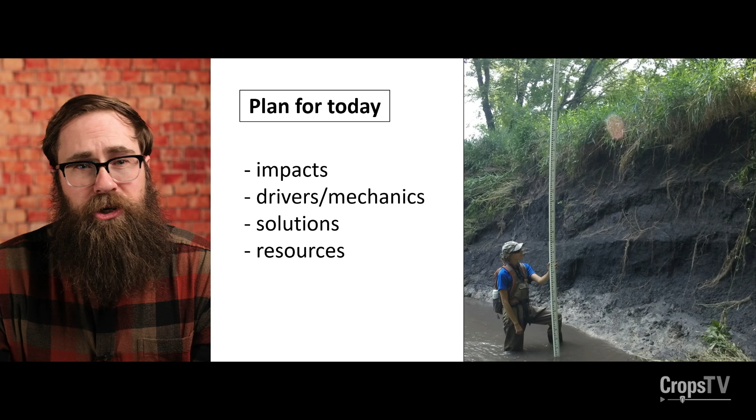I'm Billy Beck, Extension Forestry Specialist, and we're going to talk about streambank erosion. It impacts all Iowans, so let's dive in. So the plan for today, I want to go over the impacts of streambank erosion, impacts to landowners and all Iowans, and I really want to dive into the drivers and mechanics of streambank erosion. So why is this happening? Then we'll hit solutions, both from a site and watershed perspective. And then we'll go into some resources if you want to learn more.

So streambank erosion impacts. If you've got a stream running through your property in Iowa, you're probably dealing with some degree of streambank erosion. For landowners, it comes down to lost ground, threatened infrastructure, and it's just obviously very unsightly looking. For all Iowans, streambank erosion has potential to deliver sediment and phosphorus to our waterways. Sediment in excess can degrade aquatic habitat, and phosphorus in excess can be associated with harmful algal blooms. And also, we've all seen streambanks threatening infrastructure, roads, bridges, and other things. So it impacts everyone, not just Iowa landowners.

If you look into the science, streambanks contribute 31% of Iowa's riverine total phosphorus export. That's from a study by Keith Schilling and others out in 2021. And if you look around the U.S., Midwest, and the South, a range of studies have shown that streambanks contribute 25 up to 96% of the sediment exiting watersheds in those areas. So 25 to 96% of sediment loads in these areas are coming from streambank erosion.

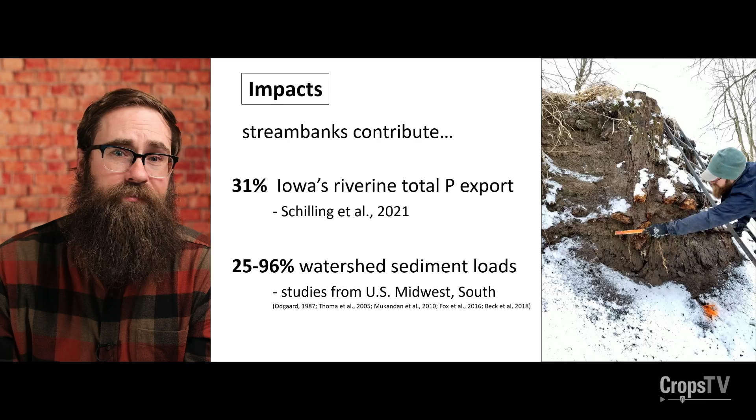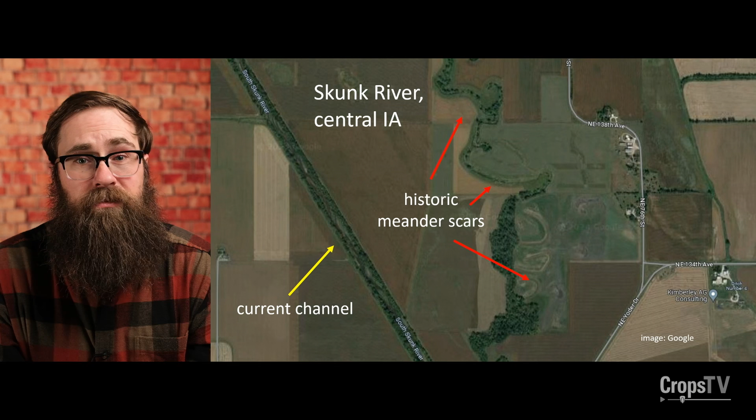Even in the middle of Iowa, going away from the Mississippi, this is the Skunk River in central Iowa. You can see the current river there with the yellow arrow, and you can see historic meander scars on the right with the red arrows. So again, even the Skunk River historically moved around quite a bit, and that's natural. In properly functioning systems with streambank erosion, sediment leaving the eroding bank would be mostly deposited on the point bar immediately downstream. So again, that's in properly functioning systems.

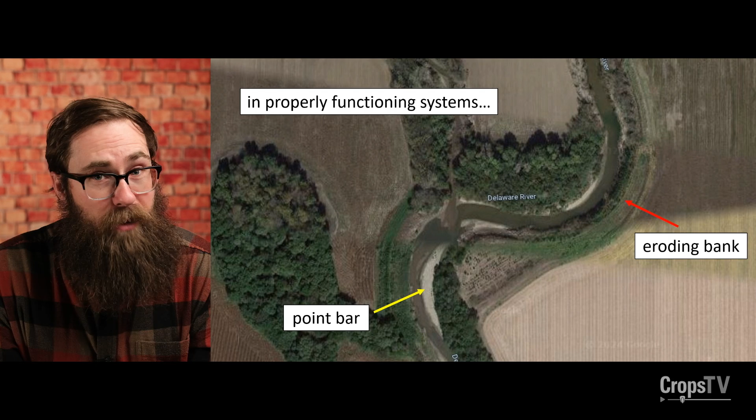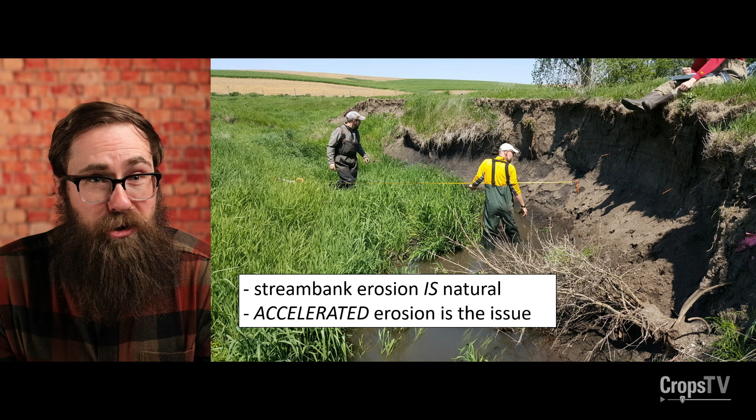However, most of our systems in the Midwest and honestly globally are not properly functioning, and we'll get into that in a second. So if streambank erosion is natural, what's the big deal? Well, the big deal is accelerated streambank erosion is the real issue, and that's caused by a range of factors that we'll hit in just a second. So it's natural, but it can be accelerated, and that's where the issues occur.

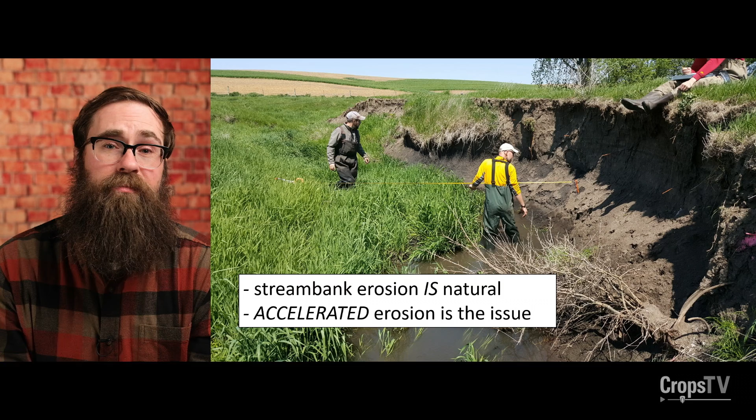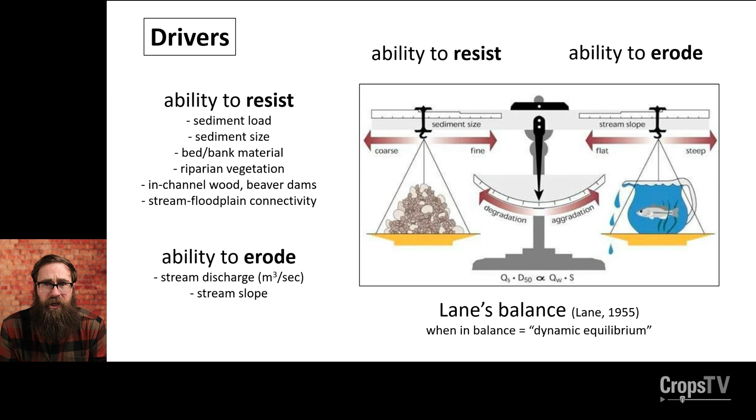And also the stream slope. You can imagine a very, very high slope versus a low slope and the power of erosion that is associated with each. So, Lane's balance: print this out and stick it on your refrigerator. It's a good thing to really get familiar with.

Okay, so what have we done on the landscape of Iowa, and honestly across the globe in many situations, to offset that balance? So here are some impacts of landscape and hydrological alterations on that balance, and really it's why we're seeing this accelerated erosion in our watersheds. So let's think about the ability to resist, those factors that we talked about on the previous slide. So what have we done in general on the landscape for the last 250 years?

Well, we've removed a lot of riparian vegetation, we've removed a lot of in-stream wood, and we've reduced sediment delivery, which is actually a good thing. Through no-till and edge-of-field practices, we've reduced sediment coming off the uplands and into the channel. However, if you don't balance that with adjusting the hydrology, the stream's going to want to pick up sediment elsewhere. It's very hungry. So where do you think it's going to pick it up? Correct, the channel.

So let's talk about the ability to erode. What have we done there? Well, we've converted land from prairie and woodland, which have incredible infiltration rates, like a sponge, the ability to soak up rainwater and deliver it slowly to the channel. So we've decreased that. We've converted to row crop, we've got urban areas, we've got parking lots. So we get a lot more flow hitting the surface of the earth and going directly into our waterways.

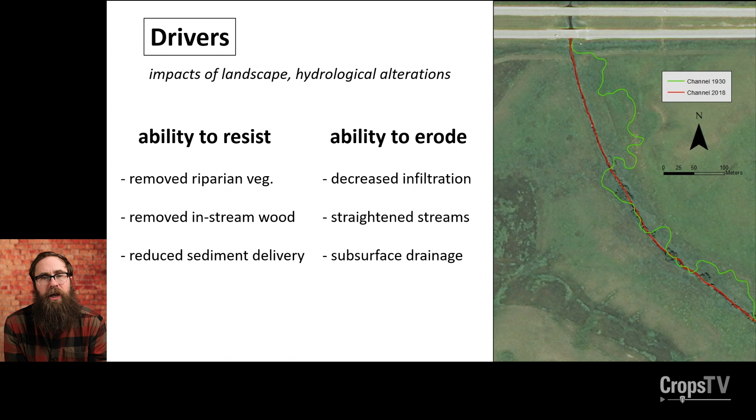So if you think about Lane's balance in that scale, we've really heightened the ability to erode, while at the same time lowered the ability to resist in our channels. So we're seeing an excess of stream bank erosion. So it's really important here to think about, a lot of times in these unstable systems, it's not a single point issue that is causing erosion, it's a watershed scale issue.

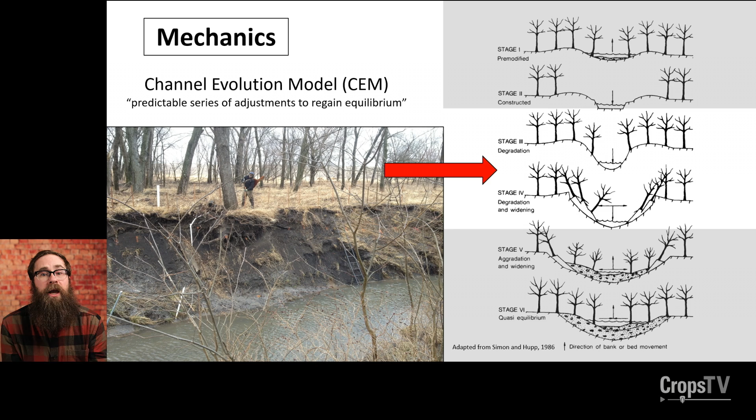So there's a really, really good example there in that picture of stage 3 and stage 4. That's just characteristic of those two stages where we're at in a lot of watersheds across the state of Iowa. Big, steep banks, big, wide channels. So degradation and widening. Eventually, the channel will form a new floodplain at a lower level and regain equilibrium.

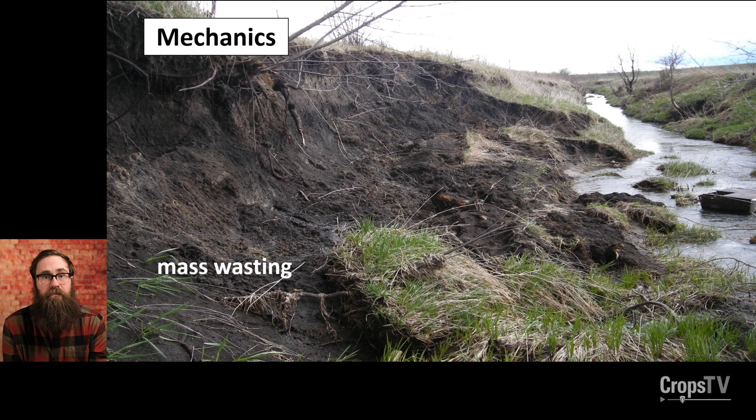Okay, so processes of erosion. Processes can help you determine where you're at in the CEM and what to look forward to in the future and how this channel is going to respond over time. Kind of gives you your bearings of where you're at. And it's also really cool to study scientifically. But we see a lot of mass wasting in stages 3 and 4. So this is giant failures of banks all at once or in giant blocks.

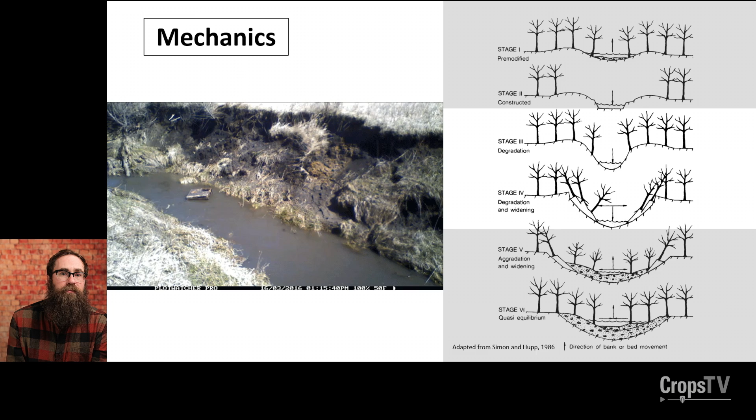That soil shrinks and swells and shrinks and swells, and those aggregates simply pop off and accumulate at the stream bank toe there, which have almost no cohesion, and they're easily whisked away by even the most moderate of flow events. So this really speaks to the importance of stream bank and riparian vegetation covering and insulating these banks, protecting them from those temperature extremes. I call this kind of pernicious erosion. It's sneaky. It's not a big massive event like mass wasting, but it really sneaks up behind you and is a significant contributor.

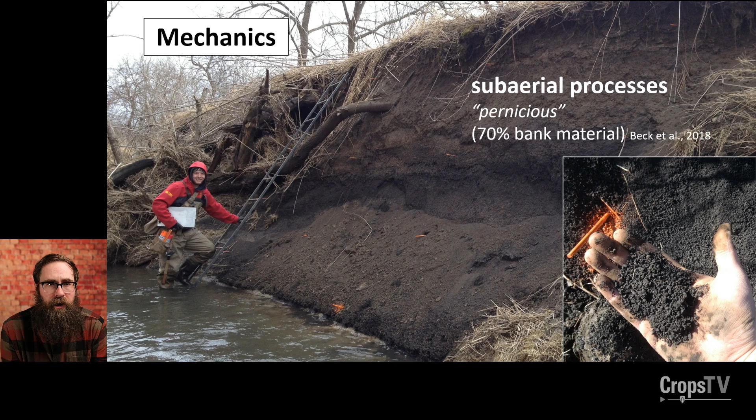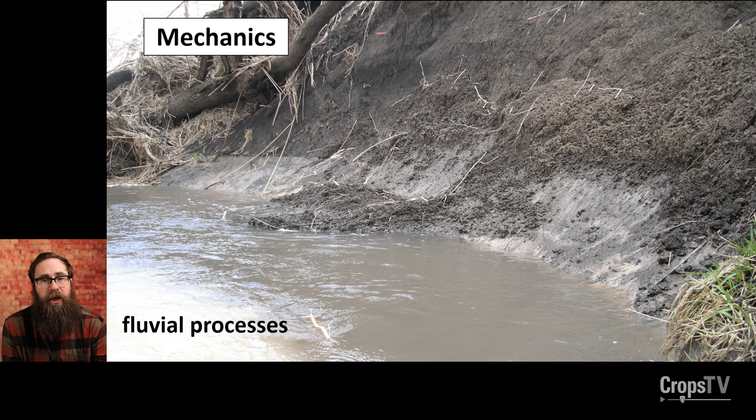And lastly, we've got the most straightforward one. That's basically fluvial erosion or fluvial processes, right? Being whisked away simply by the force of water grinding on the bank over time. If you think back to that layer cake, all those different layers have various ability to resist fluvial erosion in that system. You can kind of see a combo here. The subaerial process generated sediment is now being whisked away by the stream flow, and you can see the high water mark there.

The last thing they did is they reduced that slope from very, very vertical to about a 3-to-1 or 4-to-1 slope that spreads out, that dissipates the energy of an overbank event over a greater surface, reducing potential for scour. So, site-based solutions are not really a watershed scale approach, but if you've got cropland or infrastructure of some form being threatened, site-based solutions can work.

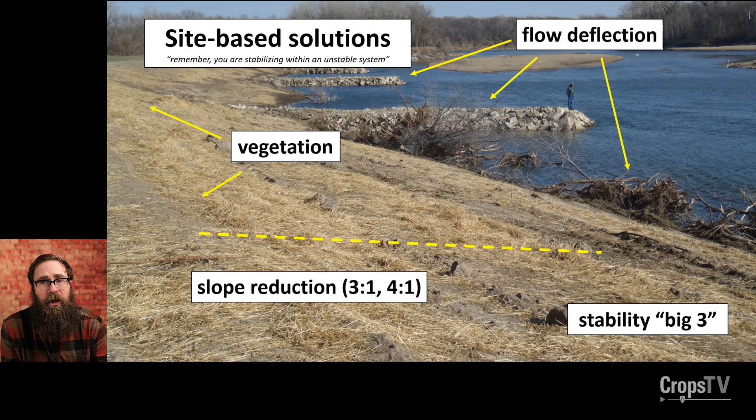All right, we're going to go from very non-complex to fairly complex here on things to do on your property about stream bank erosion. So at bare minimum, for these site-based solutions, start assessing and monitoring the erosion. See how fast it's moving and where it's occurring. Keep your eyes open for fine exposed roots on the stream banks. Those fine roots are very vulnerable in the environment and they disappear very quickly. So if you see fine roots, you know that's been very recent erosion. And take some photo points. Have somebody standing at the exact same spot year after year and see how much that bank is moving and when.

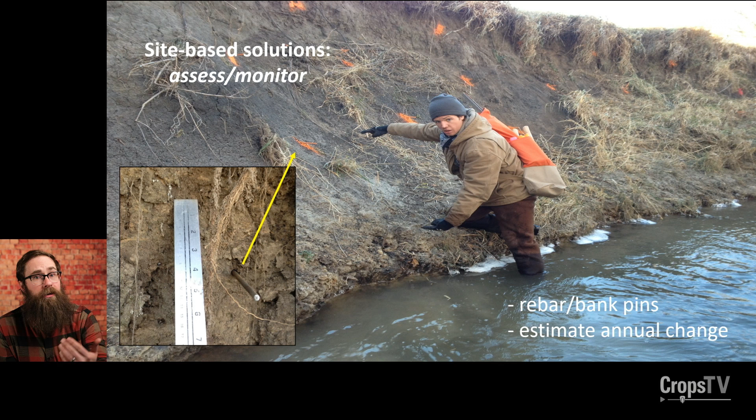If you want to get a little fancier, you can install rebar or stream bank pins into the bank, come back periodically and measure how much of that pin is exposed. That'll give you a sense of, is it aggrading or degrading, and at what rate laterally throughout the year. Another solution is just to simply back off. You know, we talk about the value of floodplains. Maybe we should back out of them and just let them do their thing. So practices like riparian buffers and livestock management are very effective at simply backing off and letting the river establish vegetation and do its thing with getting back into equilibrium.

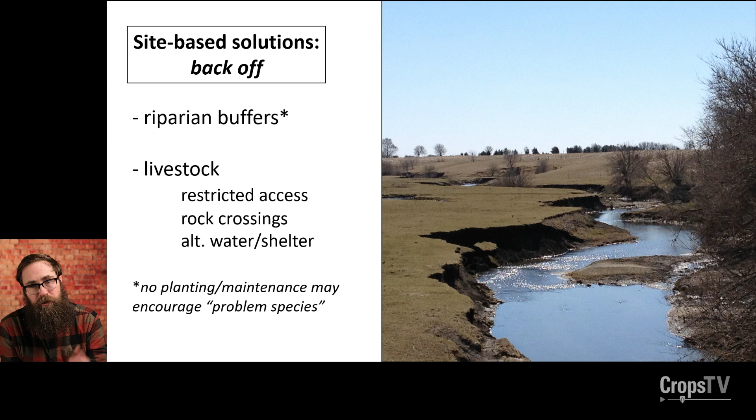Now, one note, you need to have a plan, not just simply backing out of there. In a highly grazed system like this or another highly managed system, if you simply back out and don't have a planting and maintenance plan, you may be encouraging problem species to take hold in that area. So riparian buffers and then livestock, things like restricted access, rock crossing, and alternative water and shelter to encourage the cattle or whatever livestock to spend as little time as possible in that stream channel and on the stream banks.

All right. Moving further along in complexity, tree revetments. These do a lot of things that those rock vanes, those very expensive rock vanes, were intended to do. We've got publications on this. I won't get into the nuts and bolts of installing these, but in a nutshell, these do a lot of things. A, they reduce fluvial erosion by deflecting flow away from the bank. They stabilize that bank toe and help prevent mass wasting.

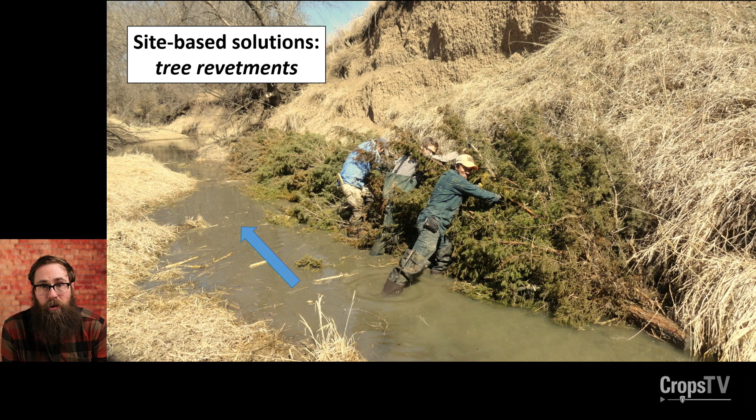And they also kind of passively work to reduce that bank angle as the bank from above continues to slough off and build up and get trapped within those evergreen canopies that you see right there. So here, these are cut eastern red cedar trees, very, very rot resistant evergreen trees that are anchored to the bank of the stream toe, and intended to slow down erosion long enough where more permanent vegetation can establish above. Again, not to get into details, but they were anchored using earth anchors.

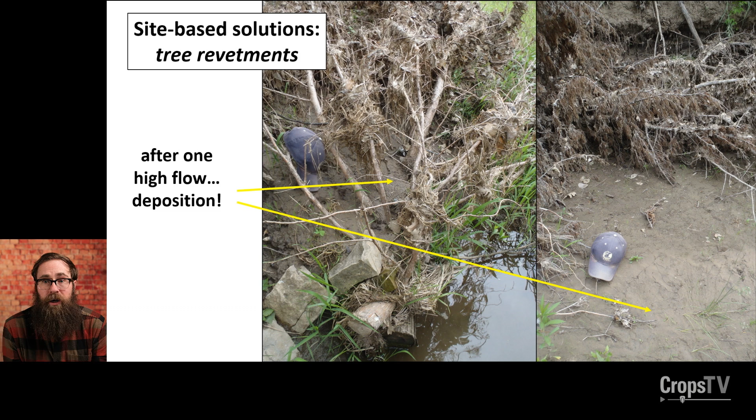This is after one high flow event. You can see the massive amount of deposition already being trapped within those cedar trees, and that's again reducing the slope, adding stability, and it's a great media for new vegetation to start emerging.

Okay, willow stakes. Again, not to get into the details for time, we've got publications on this. Cut willows in the dormant season, hammer them into the stream bank, making sure that tip is down at the groundwater level. And those stems grow roots on the base and leaves on the top. Those roots anchor the bank together, and then you've got the shading of the stream bank, protection from fluvial flow, fluvial erosion, all kinds of good stuff from those live willow stakes. We've got a pub on that as well.

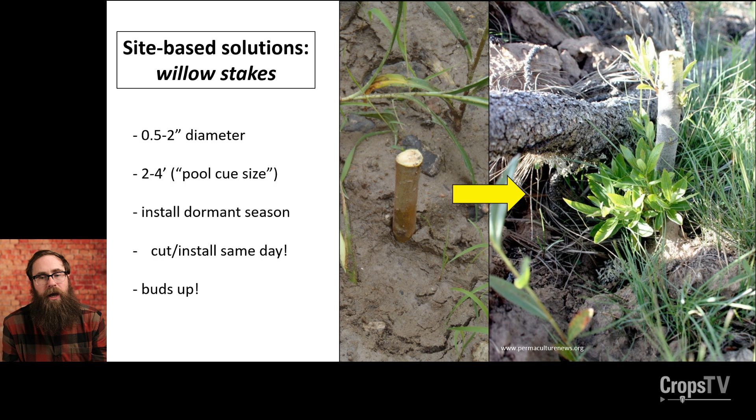All right, getting up in complexity, log vanes. Same concept as the other ones, just a little bit more substantial. So again, what these things do is they deflect flow away from the bank, and as you can see here, they encourage sediment deposition between the vanes. Again, a great media for new vegetation to take hold. And like I said before, the purpose of these things is to slow erosion down long enough where permanent perennial vegetation can take hold, and that's your key to long-term stability.

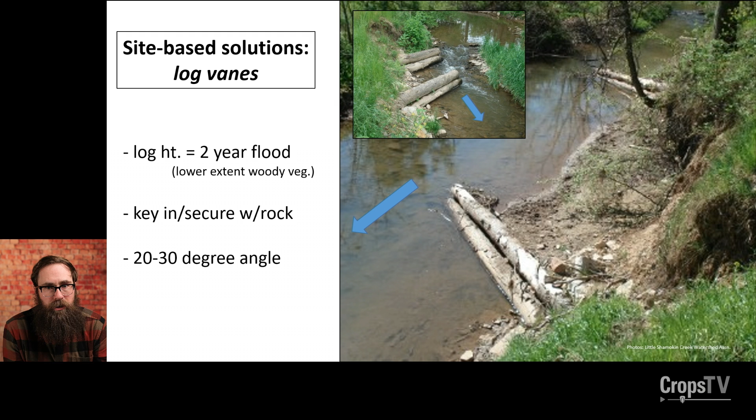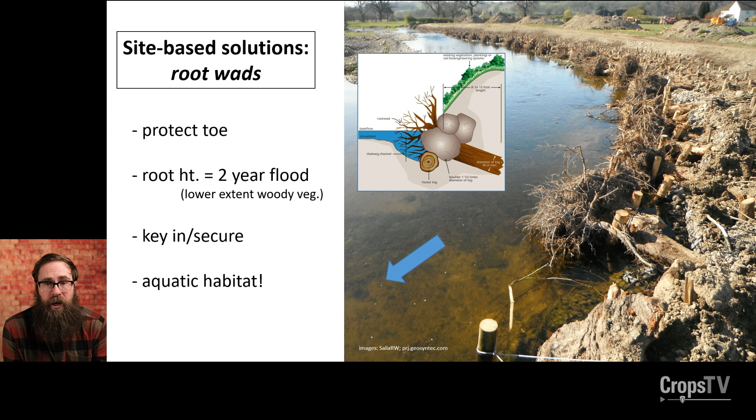Lastly, same concept, but root wads flipped and driven into the bank and stabilized there with either rock or cable or posts. One cool thing about these is they provide unique aquatic habitat in addition to working to stabilize your stream bank.

All those are great. Those are great point solutions for erosion on your property, but at the watershed scale, if we stabilize all those stream banks and don't address the hydrology alterations or the sediment alterations, we're still going to be stuck with an unstable channel. Restoring our channels to balance is a watershed scale effort. It's going to take a range of practices both in the channel but also in the field and the uplands to restore that balance and get stream bank erosion to a level that's tolerable.

And then lastly, but definitely not least, are wetlands. Wetlands are a great sponge to slow down that flow and kind of set Lane's balance back equal. So anything we can do in the uplands or the riparian areas to increase the sponge is a good thing.

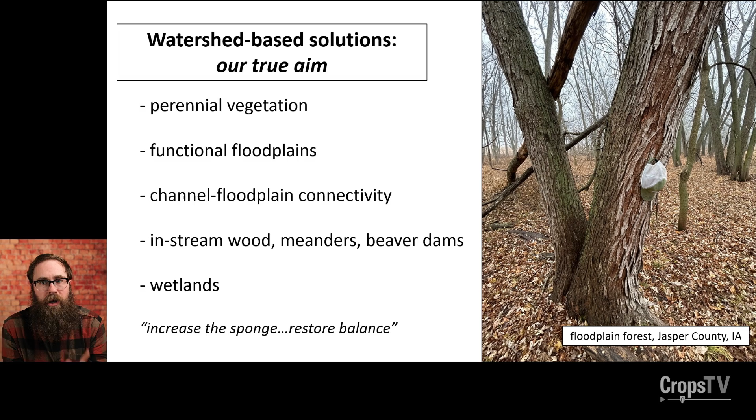To learn more, I know you're very chomping at the bit to learn more. There's a lot out there that I would recommend, and this is just the tip of the iceberg. The Iowa Learning Farms has a series of webinars that are archived. Go to their website, look for archived webinars, and search for topics such as floodplain and stream channel, and you can dive into more of the research aspect of stream bank erosion. We've got 2 Iowa State University Extension publications on our store. Just search for 4411 and 4412. It's a summary of the research that was mentioned very briefly throughout this presentation.

Lastly, I encourage you all to attend an ISU extension event in the field or an ISU extension conference around the state of Iowa and also the region. One of those that happens every spring is the Tri-State Forest Stewardship Conference. Information about that is on our website. And then me too. I'm fascinated by stream bank erosion. I love researching it. I love thinking of practical solutions and applying those on the ground for landowners. So please, if you have any follow-up questions, use me as a resource as well.